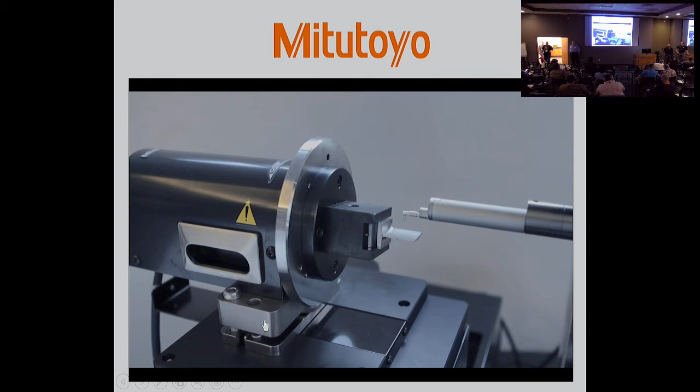Guys are going to walk through... Where'd you go? Walker.

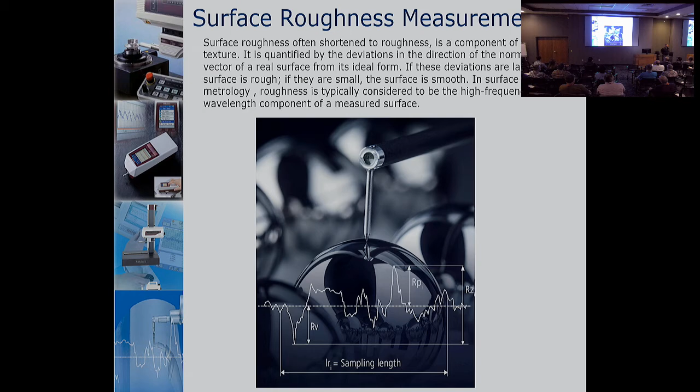Before we get into this, it's very important because most of these types of components that we're measuring for surface finish, it has a mating surface and it's critical that it functions properly. This is the very micro level of things. The very tiny peaks, valleys, and deviations of a surface can have a great impact on how something seals or mates with another part and functions for the life of the assembly.

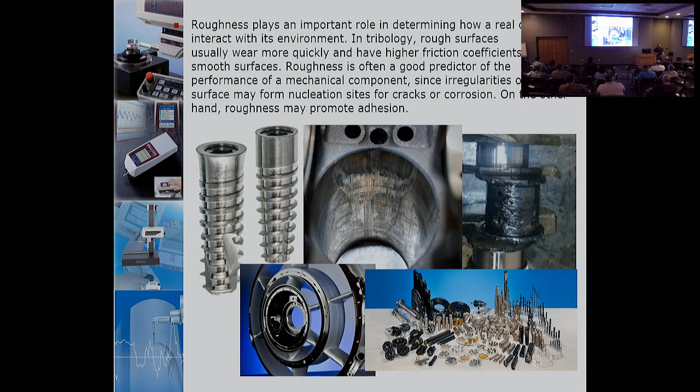So I may go through some things very quickly, but I'll very much focus on the important things here. As we look at a part from a macro level, the primary features of a surface are, on a macro level, the size, position. Then we get into this world to some degree with form.

Now we get into the actual texture of the surface. There's a lot going on there, although we primarily look at the roughness. But there are larger components like waviness. That smallest level that we're looking at, those very fine peaks and valleys of that surface that can have a high impact on its function, it's roughness, and that's what we're going to talk about here today.

Why do we measure surface roughness? Hey, I have to measure it because it's on the print. I need to make sure that it complies. Identify good and bad parts. But like most of metrology, we can use this information and control our process and adjust things before we have bad parts or defects.

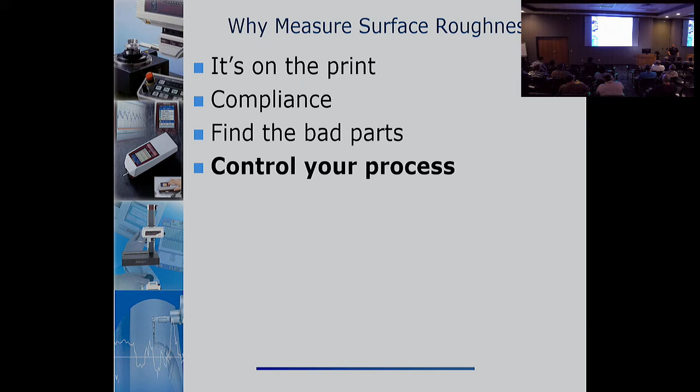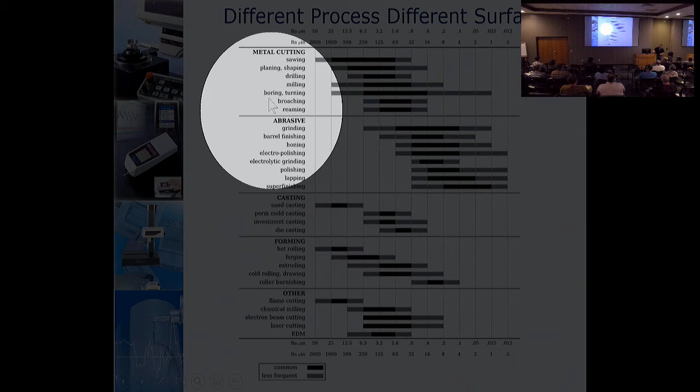This may be hard to see, but this is a nice chart. Different types of machining and ways that we make parts produce a different surface finish. You have everything from saws that will have a very coarse surface after you cut it. We're more down in the world down here where we have grinding, finishing, honing, things of that nature, where we have a smoother finish that we want to check with this type of equipment.

It's a complex science in itself, but the nice thing is there's a long history of tactile roughness testing, and there are many standards that have defined a lot of the ranges and parameters and settings and the ways you go about taking these measurements. So a lot of this presentation, I'm going to refer to some of these definitions.

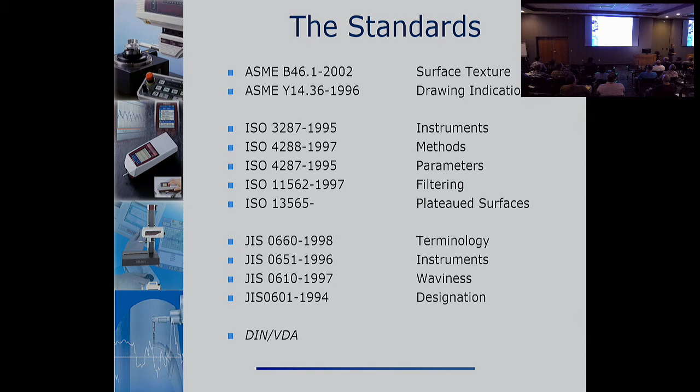At the core of tactile roughness testing is the detector, the sensor that is holding the diamond stylus and monitoring as it traverses across, measuring those peaks and valleys. Inside of all of these tactile sensors is an LVDT. It is very good, it has very fine resolution. It can see very small changes over a very narrow area.

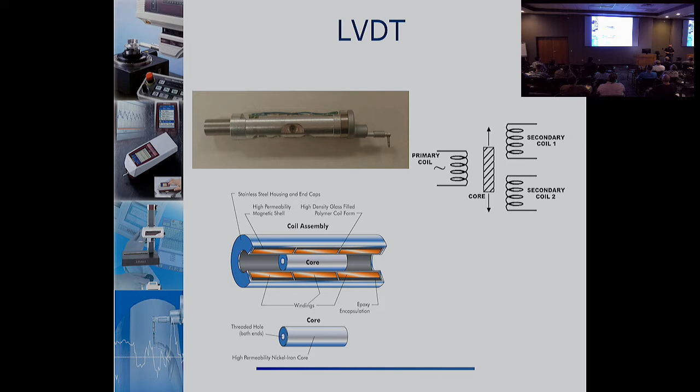Most of these sensors have a total vertical travel of 32 thousandths of an inch, or 0.8 millimeters. So we're not traveling an inch up and down, we're looking at those micro peaks and valleys, and this sensor is capable of nanometer resolution across that very small range, utilizing an LVDT.

The core system on any profilometer surface roughness analyzer needs the detector itself, which we just discussed, the LVDT, which has a diamond stylus, some type of drive unit to pull it across in the x-axis, and some type of analyzer to take that signal and create the digital data points we want, in software or firmware, and produce the results we're after.

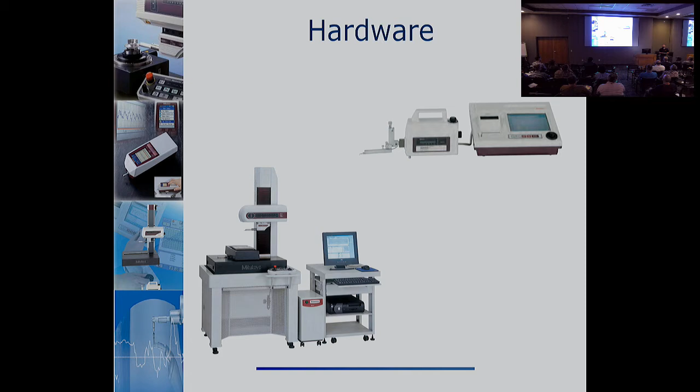There are many different types here. You've probably seen small handheld units, something you can hold in the palm of your hand, and there are systems that are fully automated with 5 or 6 different axes to maneuver parts around. But the core is always there: we need that detector that can sense those small peaks and valleys, something to pull in X, and something to analyze it.

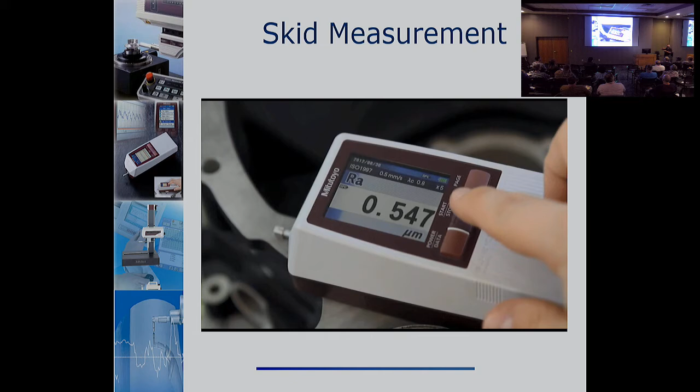It's very important in tactile roughness testing to understand the benefits and limitations of the two different types of tactile roughness testers. This is what we call a skid measuring type. The skid refers to the bottom part of that detector, which has a skid or face on the bottom with a hole in it that the diamond protrudes through. That entire skid is pressed against the surface with a significant amount of force, making this a more rigid test, something a little more conducive to an environment that's not completely free of vibration and other issues. So that entire skid is pressed against the surface, the X is pulling, and independently, that diamond stylus is monitoring those peaks and valleys as it pulls across.

As this shows, the skid type system has a skid datum, that's the face being pushed by the pivot with a large amount of force against the surface, making it more rigid. The diamond stylus itself has a very low amount of force and is monitoring the peaks and valleys as it gets pulled across. This is the most commonly used system because it's very compact. It's more protected, since that skid nose piece protects the stylus to some degree. They're the least expensive and the most commonly used.

But there are limitations to this type of system. One limitation is because of the mechanics of that skid following the larger components of the profile, and only measuring the smaller components with the diamond, you can only measure roughness with the skid type system. There are some other components to the surface that sometimes we want to monitor, such as waviness, that is mechanically filtered out if you're using a skid type system. But most of us are after roughness.

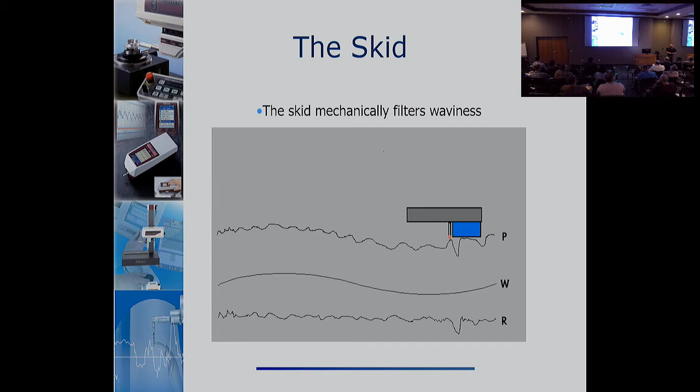A skidless system, as the name implies, gets rid of that skid. No more skid being pressed against the surface — now only the diamond tip of the stylus is in contact with the surface. So this is measuring the true profile with no mechanical filter. The benefit here is, if you could perfectly measure in the same place with the two types of systems, skid and skidless, since this is free of any type of mechanical filter, this would always be the best representation of that real surface, because only the diamond is touching and monitoring those peaks and valleys.

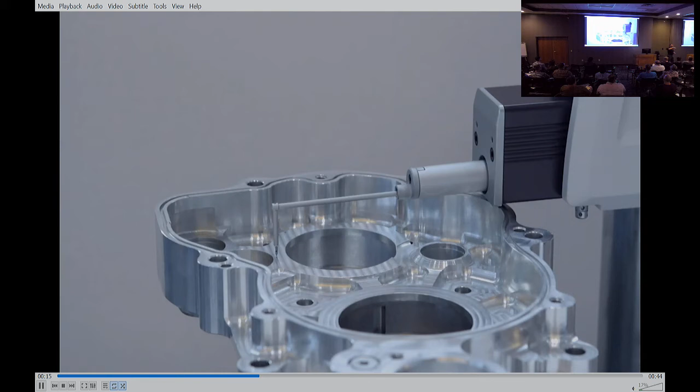There are a lot of benefits to this. As I mentioned, it's a truer representation of that surface. It can do other things besides roughness, such as waviness. The skid system can only measure on a linear, flat surface. If you had to measure on a non-linear surface, like a radius, for surface finish, that skid would prevent you from following that surface and measuring. The skidless system not only can physically follow a non-linear surface, but those systems will also have, either in the firmware or software, the ability to compensate or remove the overall geometry and give you roughness. I have an example of that here in a moment.

The only drawbacks to a skidless system.

Oh boy, you're not going out there. There we go.

The only drawback here is, since you don't have that skid and that high amount of force pressing against the surface, this is a little more susceptible to environmental issues such as vibration or even airflow. If there's a vent blowing directly on the sensor, that can impact the resolution we're measuring. This is a rigid coupling, so you have the x-axis pulling only the detector, and the only movement is in the LVDT of that diamond following the peaks and valleys. So true representation of the surface, able to do many other things besides roughness. The only drawbacks are this system is a little bit larger, the drive unit itself is a little bit larger, it's a more expensive system, and it's a little more susceptible to things like vibration and environmental noise.

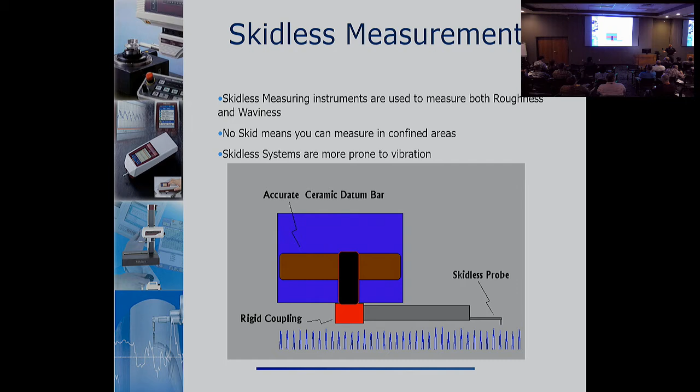So that's kind of the hardware, and that's a big thing to consider. There are definitely limitations with skidded - the styli only get so small, and some of the other things we talked about. The skidless has a much larger variety of probing or styli. They get smaller, deeper, longer with skidless. So that's a review of the hardware.

Now this gets pretty technical, but it's very important to understand what's really going on when we take a measurement and how that finally gets you a number at the end, RA of 32 microinch or whatever it may be. It's not as simple as most of you have found. You don't just tell a system, measure a half an inch and give me an RA. There's a little more thought to it. There's some things we have to consider of the surface that we expect. So we're going to get into some of those things.

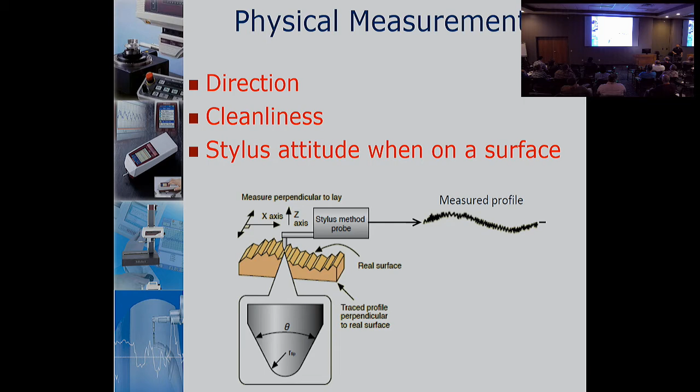Here's the fun stuff. So whenever we're looking for some type of surface texture, we're always applying two filters. We're going to eliminate things that are larger than we're looking for, and smaller, even with roughness. So a good analogy is, and we'll do this in a moment, just think of the frequencies in a surface - we have large ones, small ones. Let's talk about them like they're rocks and boulders and mountains. We need to isolate small things and get rid of big things.

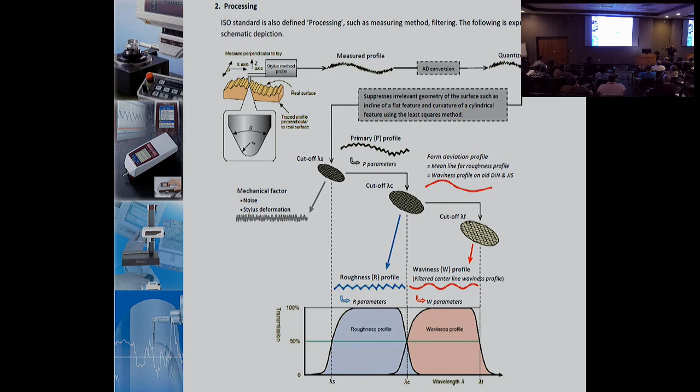That LVDT is an analog sensor. So as that core moves up in the LVDT, it's changing the analog signal that's coming out. Well, we can't do much with that signal itself, so we need to convert it to digital information. So there's always going to be a filter that gets set, and I'm going to make your life easy - we almost exclusively use the Gaussian filter. There's some other older filters for older technologies. Now the Gaussian filter is used as your signal filter if you ever see that on any of your equipment. We're going to use a Gaussian filter that converts the analog signal to digital data points. That one we won't dwell on too much.

Here's the fun stuff. How do we decide what to eliminate, large and small? Well, it's all standardized, but let's start at the macro level, and whatever surface we're measuring, let's think as if we're out in space and looking at a mountain range. We can see everything - we can see the curvature of the earth, the really large peaks and valleys, and as we zoom in, we can see some of the other things.

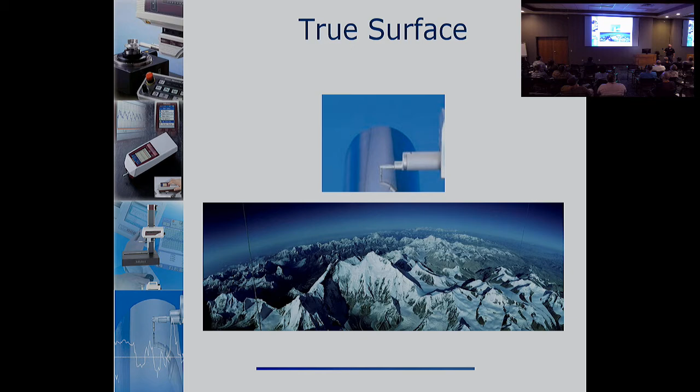So that top picture, let's think of measuring surface finish on an arc like that and see how we get to the point where we isolate the roughness profile, because once we have the proper roughness profile, we can derive the roughness parameters that we're after. The very first thing that we have to do is eliminate any overall contour. If you're on a linear surface, there is no overall contour - we're just linear. But in this example, if we're measuring on a radius, the first thing we have to do is remove the radius. There are some other types of compensation - parabolic, elliptical - but they're very rarely used.

It's usually when you're measuring on a radius, you use things like we see at the top, curve compensation. So if we turn that on a system, it will create a best fit circle and then take all those smaller components and straighten them out on a linear graph. So it's very important, if you're not measuring on a linear surface, you need to make sure you compensate for the overall profile.

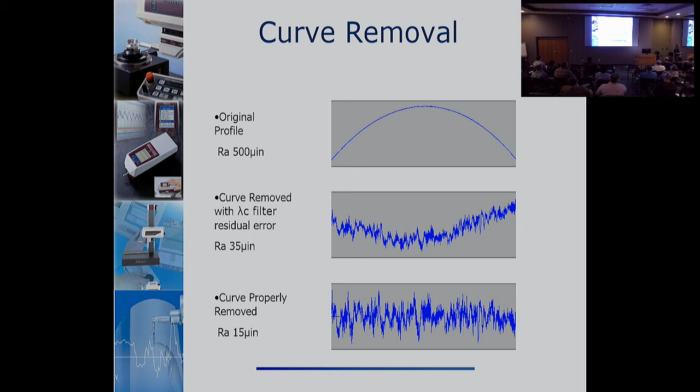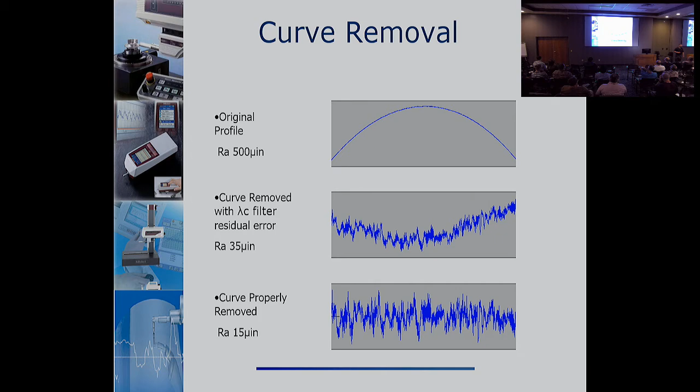There's the curve, and we take all the information along the curve and straighten it out on a linear profile. It's very important - let's look at these three pictures. If I use my roughness tester and measure it on a curve, and I did not apply a compensation filter, I might get a number like 35 microinch, and there's some residual error still in there from the curve. If we had done it appropriately, we'd get the graph on the bottom, and it's a very different number of 15. So if your call out was 16 microinch and you didn't do this properly, you start failing parts because you're getting high numbers when in reality they were passing.

There are things like tilt and inclination compensations as well. Now that we've removed any overall profile, what we have left is referred to as the P profile, or primary profile. That has all the different frequencies of surface texture.

We don't usually see these called out on a print. You don't see PA or PZ, but it's always in the software firmware, the start point. We have that surface texture information, the P profile, and typically we're going to start removing things to isolate the frequencies that we want. So you can think of that P profile as looking at that mountain range once we took the curvature of the Earth out.

This is not as common as roughness, but another profile that is sometimes considered is called the Waviness Profile. It's the larger frequency components in the primary profile. If we want waviness, on the low end we remove roughness, get rid of all the small things, and on the high end we get rid of things larger than we're after with waviness, and that depends on the part. As you can see from the previous slide, all that noise or smaller frequencies that were in the primary, we can remove those and have the larger frequencies and get waviness.

That's commonly used on large area sealing surfaces where bigger frequencies may dissuade the mating part from sealing properly. But what we're usually after, and waviness would be like the larger ridges, removing boulders and rocks and things from our mountain range.

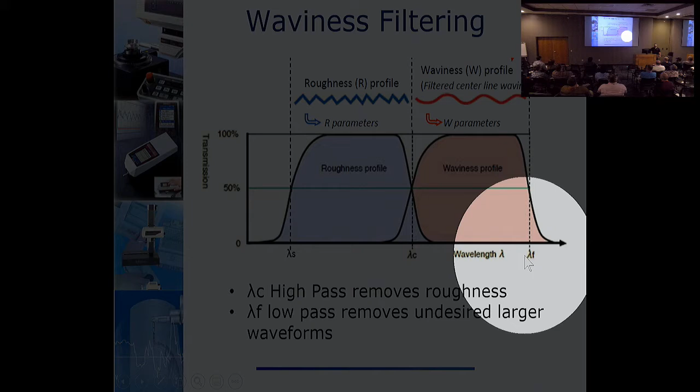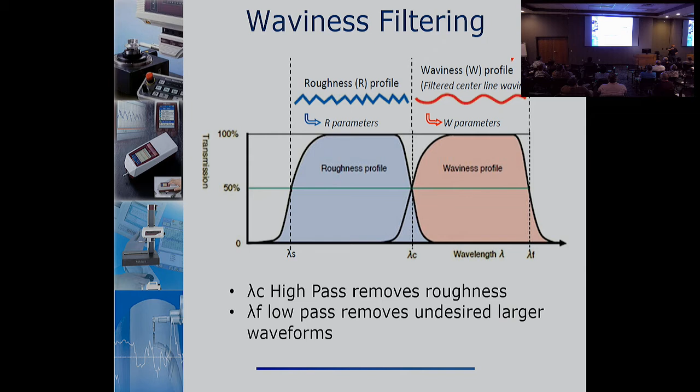This is kind of showing the types of filter we use, and we're going to start seeing these at the bottom here. I keep forgetting I have this guy here. The Greek letter lambda S, lambda C, lambda F. We refer to these as cutoffs or filters, because what those are establishing is: these frequencies that are smaller, take them out; larger, take them out; and we've isolated what we want in the middle.

This is the one that we're usually after. In roughness, that middle character at the bottom, lambda C, has many names unfortunately: sampling length, cutoff, lambda C. That is our high pass filter. So when we set a horizontal value like 30 thousandths of an inch as lambda C, what that means is any waveforms larger than 30 thousandths of an inch, remove them.

On the other end, on the left down there, we see the lambda S. That's our low pass filter. Filter out things that are smaller than this number. We'll talk about that in a moment with roughness.

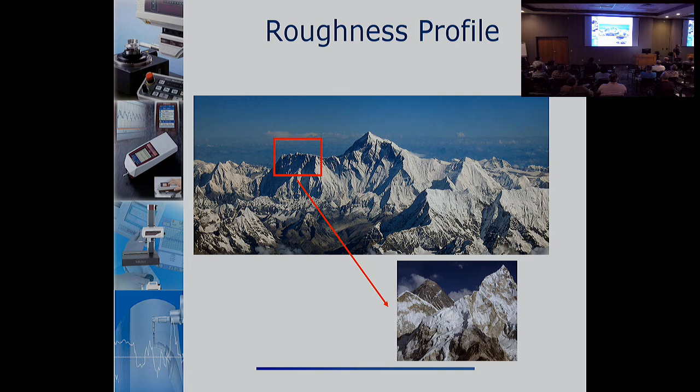Roughness, we can think about, we're trying to take out the larger components like the big ridges and isolate the smaller things. In this analogy, like boulders. Maybe we're walking across and we want to know how hard it's going to be. But there might be very small things that we also want to eliminate.

In roughness, those small things are typically noise. It's frequencies created by electrical noise in the system itself, some noise in the environment, vibration to a degree, and some other things. But there can be this really high, small amplitude, high frequency components that we want to eliminate on the small end that are noise.

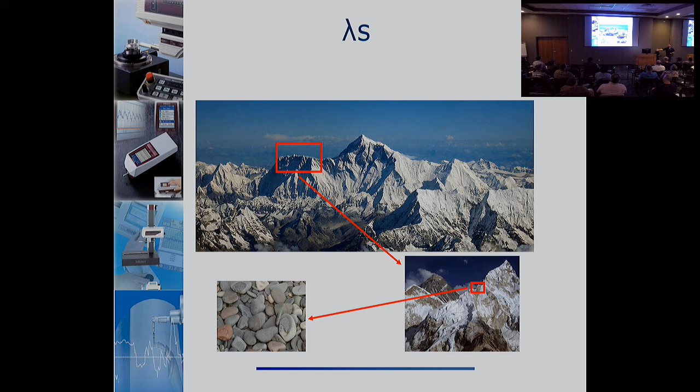We want to isolate roughness, so we take out the bigger things, waviness, and isolate roughness. So we can think of it as like mesh filters. If you're after a certain size rock, you can use one mesh to get rid of the little things, another mesh to get rid of the bigger things, and what you have left are the things in the middle that you're after.

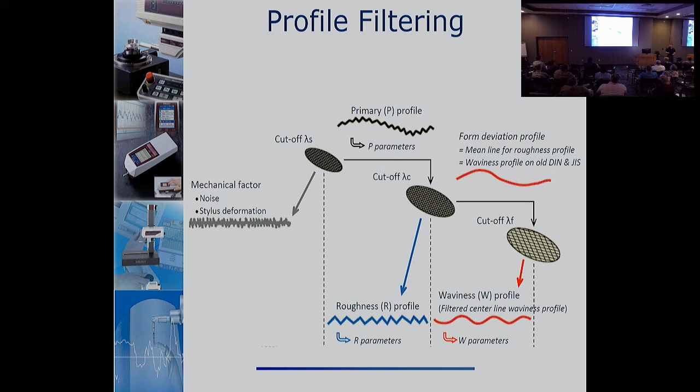Luckily, we don't just arbitrarily decide I'm going to use certain values. This is all standardized, so when you see your print and it says check 16, that's assumed roughness, roughness average, RA, 16 microinch or less on our callout. Just that value tells us everything we need to know to properly set up this test.

In microinch, that's everything from above 4 microinch up to 80. So most of you, as you're doing your testing, you see 8 microinch RA, 16, 32, 63. Those all fall in that range. The standard tells us we use a 30 thousandths of an inch cutoff, and that's what we typically use.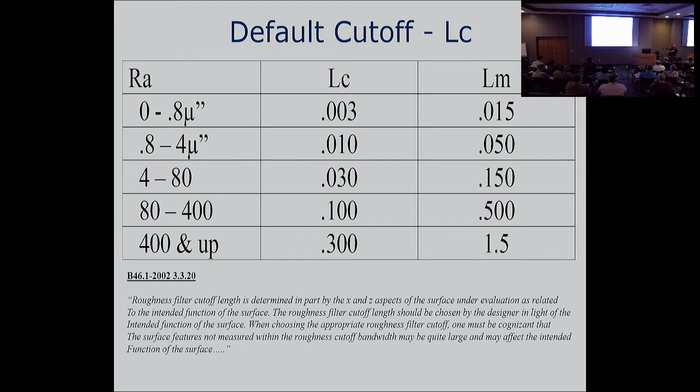That lambda C, your sampling length cutoff, is the most important thing because it acts as a filter. If you use an inappropriate one, you're filtering inappropriately and you'll get the wrong roughness profile, with incorrect results. So per the standard, you should use the appropriate one. That's one component of setting up a tactile roughness test, and it's the most important.

So what else creates the overall length that we're measuring? Well, we usually want more than one of those cutoffs, say 30 thou. The optimum number is 5. So if we set a 30 thou cutoff times 5 samples, we are evaluating 150 thousandths of an inch.

The yellow there is a feature on all of these systems called pre and post travel. It's extra distance you can add at the beginning and end that allows the motor to start pulling the system and ramp up, then in the middle take your test at a consistent speed, and at the end, the post travel, it ramps down. So your measurement evaluation length in the middle is done at a consistent speed.

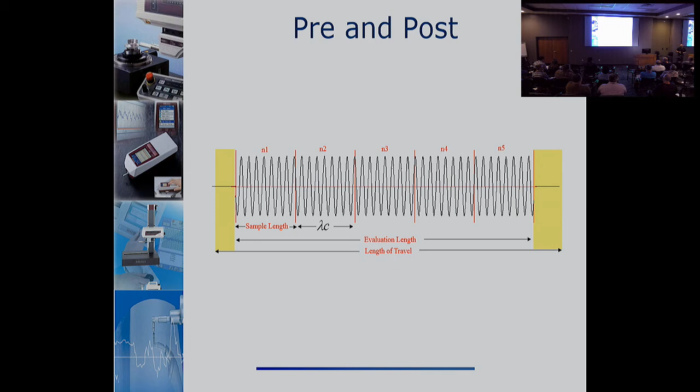As I mentioned at the beginning, we don't walk up to the system and say, measure an inch and give me RA. We look at the expected RA, define the appropriate sample length, use X number of samples, 5 if we can, and turn pre and post travel on and off. All of those things produce our traversing length, the actual physical length that it'll pull.

Someone may say, what if I have a 16 finish, but the land I'm trying to measure is only 100 thou wide? Well, all those settings, 30 thou times 5, plus pre and post, that equals 180 thou. So what should I start manipulating first to reduce this length to measure on a smaller surface?

Pre and post travel is the first thing you can eliminate. That's nice to have on, but it's the first thing we take away if we need to. Then, if you still don't have enough room, start reducing the number of samples. If it's a 100 thou length, we would set our system to a 30 thou cutoff times 3. With no pre and post travel, now it's going to physically measure 90 thou on that 100 thou surface and give us our result.

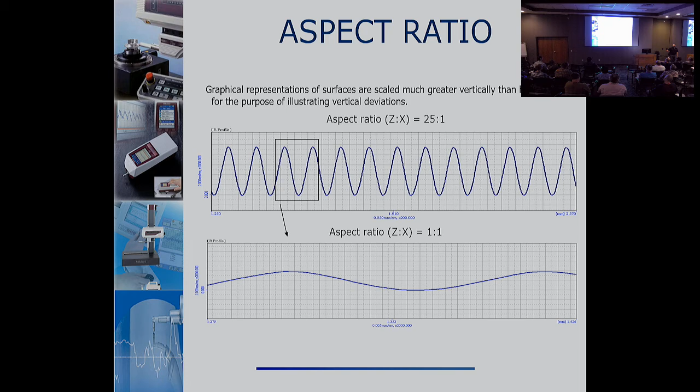Aspect ratios: when you're looking at a lot of these reports, they're greatly exaggerated in the vertical axis. If they weren't, everything would just look like a fairly flat line because the deviations up and down are so small. We greatly magnify them so you can see the peaks and valleys across there.

I keep referring to a diamond stylus. These tactile systems have a diamond on the end, and those come in a variety of sizes and angles. That's all standardized as well. Most systems and most surfaces, you should be using a 2-micron radius diamond with a 60-degree angle, or a 5-micron with a 90-degree angle if you're on a rougher surface.

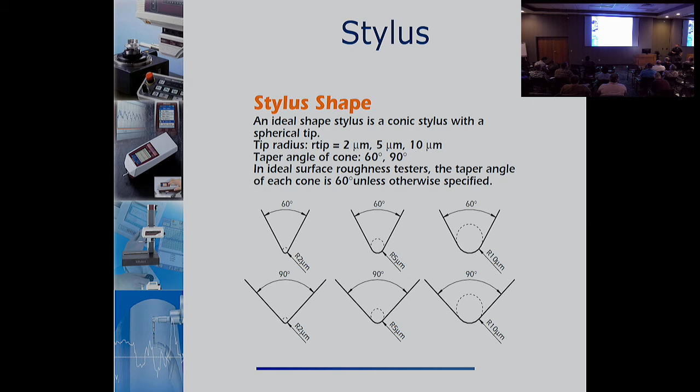We have information, charts and everything that can tell you, hey, your print calls out a 16 micro-inch finish, you should be using this diamond, this setting, this setting, this setting. So that's the beauty of it, and a lot of the systems and software will have assistance right inside to help guide you.

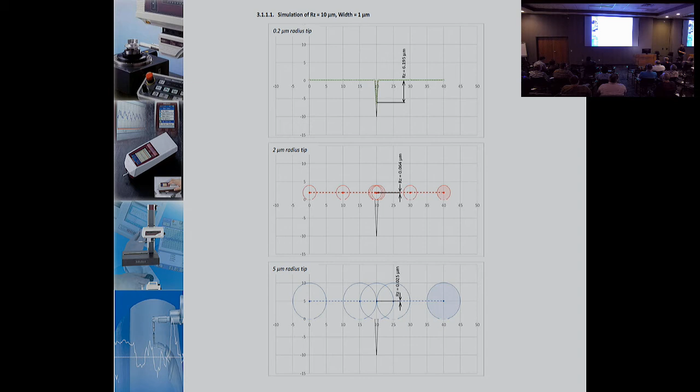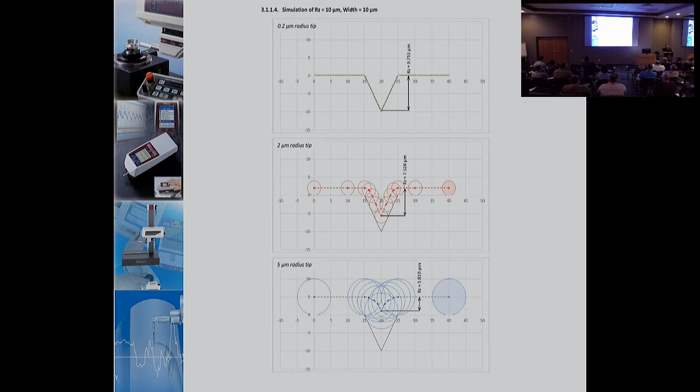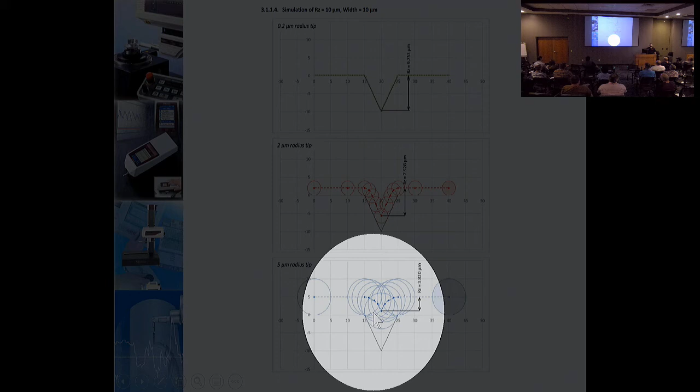This is a pretty cool theoretic test with different diamonds. If we think especially of the valleys, depending how narrow and deep they are, different sized diamonds can only get so far down. What this shows is if you took a 5-micron radius diamond tip and tried to go down in the valley, versus some theoretic perfect 0 radius diamond, it would get all the way to the bottom. With a 2-micron radius tip, it would follow the surface and bottom out around here, getting close to the bottom. But if you use too large a diamond, it's going to slightly enter the valley and then come back out, and you won't get the depth that you expect.

So that's kind of the hardware, and then the theory of all the settings and filters. Why did we set all that up? So we could physically trace across the surface, use the appropriate filters, and create the roughness profile. All the parameters we're after just use that profile and apply different calculations to report the numbers we want. As long as you have the right settings and use the hardware correctly, you'll get the correct roughness profile, and from that you can get all the answers you want for 2D roughness.

I'll mention a few other things. Calibration of these systems is a little different. They typically come with a 120 micro-inch RA reference specimen, with a very uniform sine wave surface at 120 micro-inch RA. We go through a calibration procedure: we measure it, it's supposed to be 120, we find out what it measured, then use those two values to come up with a compensation value. It's very important to calibrate these systems, but not too often, because every time you calibrate you're changing that compensation. So I suggest calibrating when necessary, like when changing styli, depending on usage frequency, but verify as often as you want.

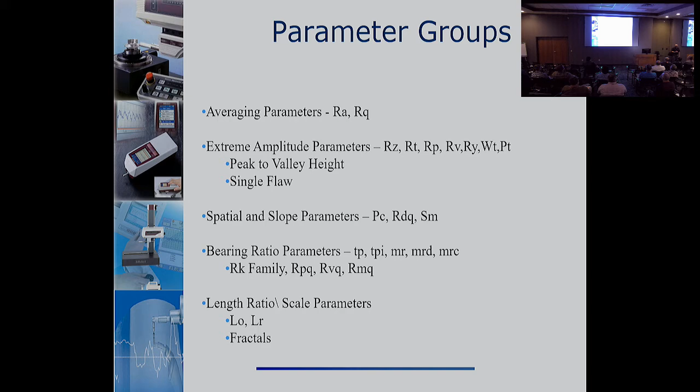All right, we use the right hardware, the right filters and settings, and now we've created that roughness profile. It's just a bunch of data points, but it's the correct filtered roughness profile. I'd say more than 90% of users are only after one thing on that profile — capital R, small a, roughness average. But there are many other useful parameters, grouped into families. I'll go through these pretty quickly and point out some important ones.

There are two averaging parameters. The one everyone's familiar with is RA. It calculates every single data point's distance to the mean line, the center, in every cutoff, and then averages them all together. This is the most stable and consistent parameter. Since it's an average, it's the one we use to correlate and calibrate, and it's the one used mostly in the industry to check parts. Because it's an average, it has a lot more consistency.

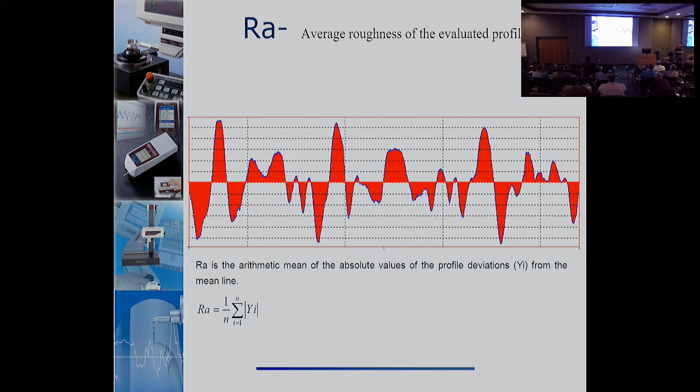Maybe 10 years ago, I would have said 99% of users only look for RA. But RZ is a very important parameter, and it's becoming more and more used. Probably eventually we'll see on most prints an RA and RZ callout, because RZ is almost the opposite of RA. We're looking for the extremes in each cutoff.

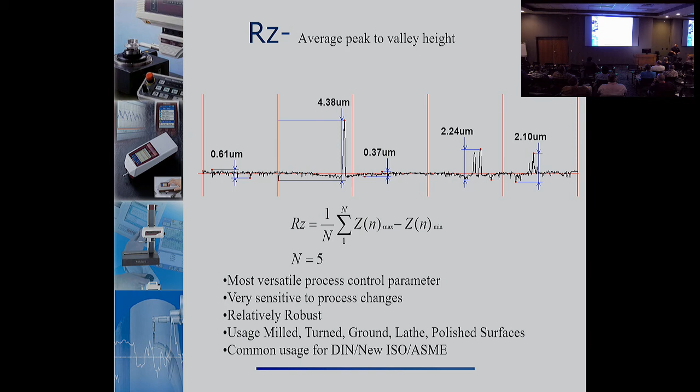So if we set this to 30 thou times 5 for our setting, it creates this roughness profile. If this were our first cutoff, this first 30 thou, what RZ does is it finds the very highest point and very lowest and gives you that vertical distance. It repeats that in each cutoff, and then it takes those values and averages them together. So it's the extreme peak to valley in each cutoff, averaged together, so you're getting an average of the extremes across the surface.

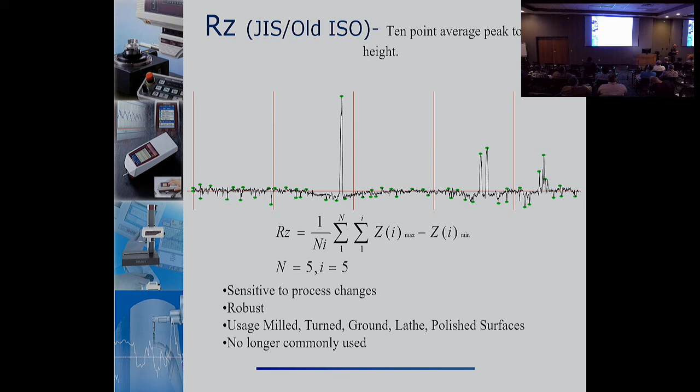So that gives a lot more definition. If we measured those 3 different surfaces that looked different from each other, they would have radically different RZs where they had the same RA.

RP - sometimes in this type of test, we're more interested in the peaks. Maybe this is a sealing surface, and if a peak is too high, it won't seal properly, and we'll have an avenue for gas or liquid or whatever it is to escape. So there are parameters like RP, which look at the highest peaks in each cutoff or across the whole thing.

Conversely, RV, roughness valley depth. If we're really interested in the valleys, RV can tell you a lot about how deep those valleys are across those surfaces.

And then we get into some really specialty ones. RZ1max will look in each cutoff and see what the peak to valley height is, and then report to you the one that had the biggest value. So it's like the extreme of the test that you took, at least in one cutoff.

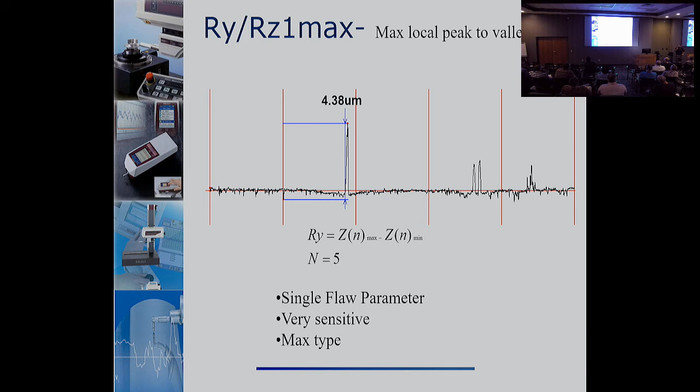And here's the most sensitive parameter. RT is called roughness total height. Anywhere across my test, find the very highest, the very lowest, and tell me the total height of this roughness profile. So that's going to be the most sensitive. If I measure here and there's really no peaks, I'll get a low number. If I measure over here and there happens to be one really big peak, it's going to report that. So it's the most sensitive.

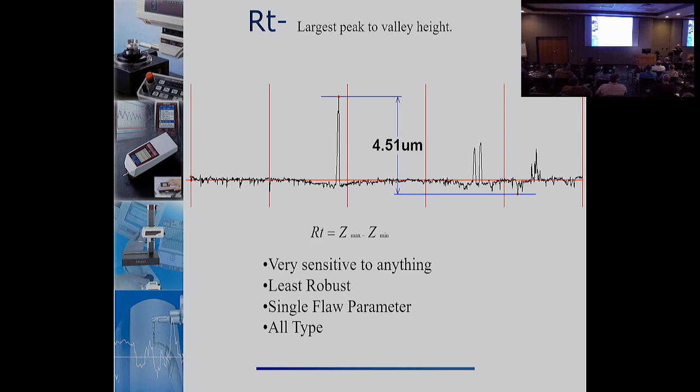And then there's a bunch of specialty parameters that have a lot of definition and can do some predicting. I think there are about 80 roughness parameters throughout the different standards that you can use for different situations. Most of the time we're looking at the peaks and valleys because something is mating to the surface. Sometimes we want valleys to be deep enough to retain lubricant, like a piston in an engine, in a cylinder liner. If it's too smooth and doesn't have valleys, it can't retain lubrication and it's going to get hot and seize up. If it's too rough, those two surfaces are going to degrade each other and cause damage.

So we need something in the middle, a sweet spot. There's a whole world of parameters that can look at those profiles and do some predicting and estimation of lubricant retention, things of that nature. If it's a metal seal, we're probably looking at the peaks a lot, right? Because any protruding peak is not going to let it seal.

But you'd be surprised some of the things that these parameters can help you identify. Some of them are useful for adhesion. The X distance spacing horizontally of peaks can impact how something will adhere to that surface. If you don't have enough peaks, maybe the paint won't stick to it. So there's a whole world of them on all these systems.

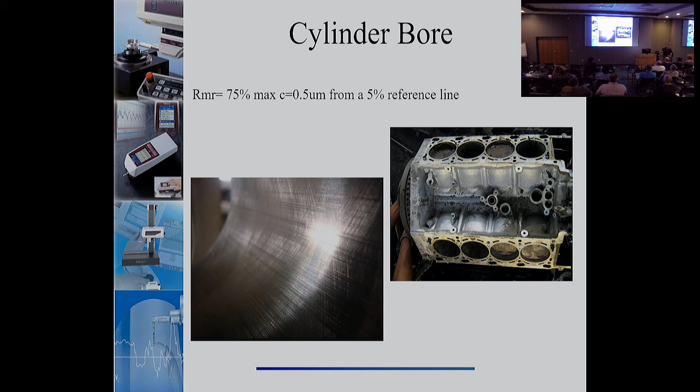It's surprising. If you look at a vehicle, there are hundreds of different components that require some type of surface texture test, waviness, roughness, the different parameters to identify bearings that are carrying a load or how something is going to seal. There's so many uses for roughness or other surface testing, and it's not just vehicles.

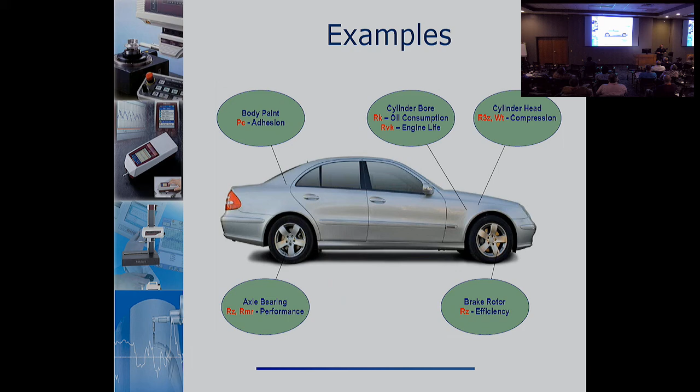It's any critical component that especially is going to have a mating part and have some type of friction or anything like that. And then I like to show this because there's a whole standard about how to properly call out surface roughness on a print, and almost no one utilizes the right way. We just see a check mark with a number.

There's a lot of assumptions there, and it's very common. So if we see a check mark with 16, we start assuming, well, we're after RA because you didn't specify any other parameter. 16 microinch RA upper limit.

But there is a way to control many other things when doing a roughness test. And some of those advanced tests where you want to set a lower limit, an upper limit, maybe more than one parameter. You can identify if this test should be taken before or after a certain process. There's a whole science to properly calling out roughness that almost no one uses.

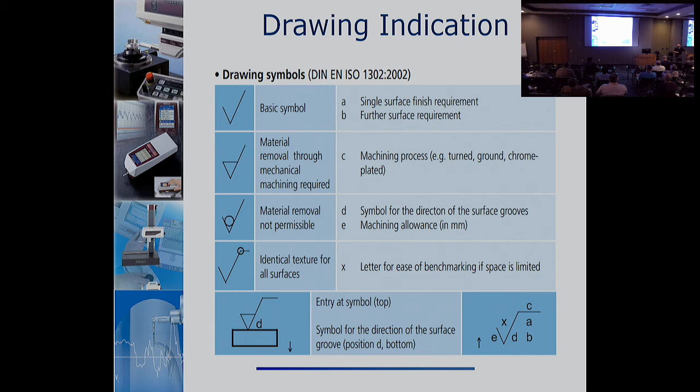The Germans like to, though. So yeah, if you see anything like this on a print, that's probably a more advanced test, and there's different areas in those boxes that they're placing different identifiers that will tell you how to set up your test.

Luckily for everyone in this room, Productivity Quality has a lot of very knowledgeable staff that use these systems and can guide you through taking the correct tests. And then also, Mitutoyo has a lot of resources that we can provide as well. So that's 2D tactile roughness testing.

If you get anything out of that, it's that cutoff. Look for that chart. Look at the number you're after. If you're making a really smooth part and it says the RA is 2 microinch, that means a lot. That tells you what sampling length to use, the number of samples.

It's the most critical component because if you use the incorrect cutoff, you will get the incorrect roughness profile, therefore you will get incorrect results. So it's very, very important.

Any questions? I'll hang out afterwards too if you have any questions for me, but I appreciate your time. And I'll hand it over to Adam to discuss non-contact surface testing. You want this thing?

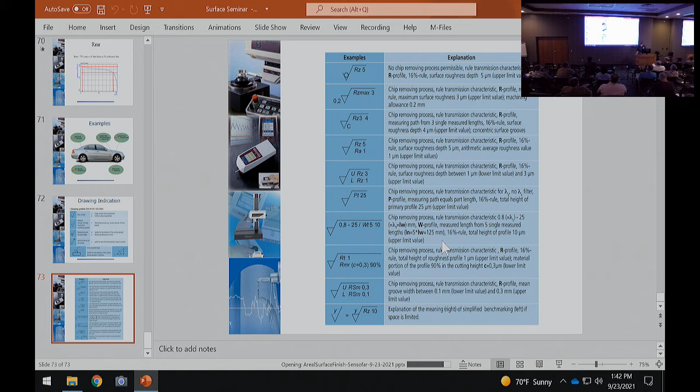All right, hi everybody, I'm Adam. I'll tab through this pretty quick, but I'll be around here after the presentation for questions, and we also have our Sensofar SNEOX out on display, so I can talk about it more later in detail with anybody who's interested.

So our Sensofar SNEOX is our 3D optical profiler, so we're going to be looking at surface finish, form, and small geometric features, obviously without touching it optically.

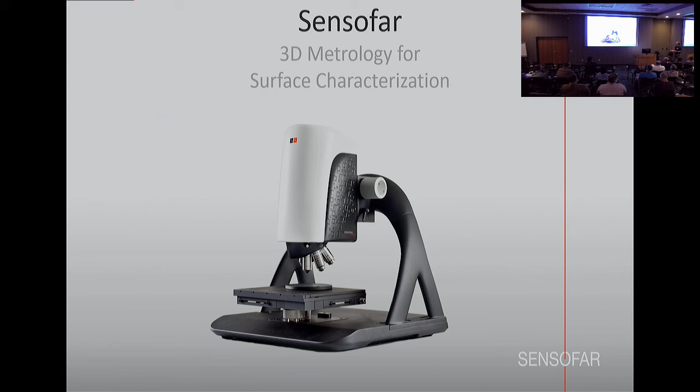So what are we doing with this? We're going to be gathering a 3D point cloud. So we will be looking down on our object and we'll be able to measure X, Y, and Z space.

We have a couple technologies to do this. These are technologies common across the industry. Sensofar is unique where we have all three of these technologies in a single sensor head. First we have a confocal technique. We have an interferometry technique, and we have a focus variation technique. Confocal and interferometry are going to be our surface finish techniques, and then focus variation is typically used for our form or geometric measurements.

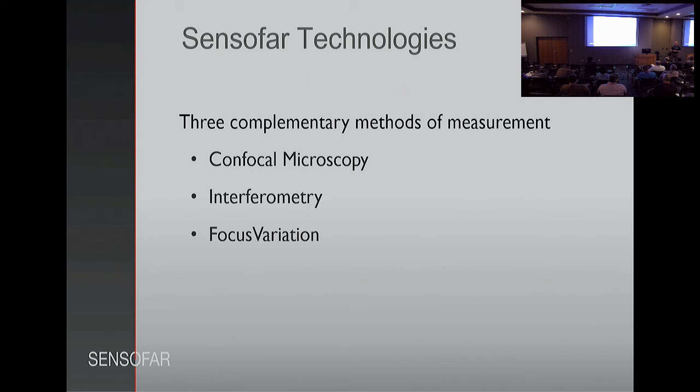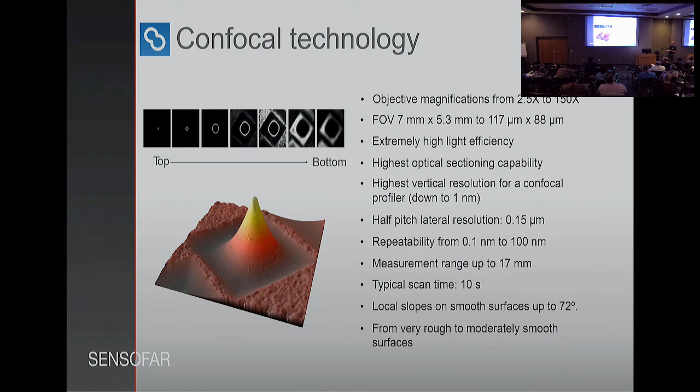Confocal, we have the best lateral accuracy with that. So in X and Y space, we can define features down to 150 nanometers. With that, we still have fairly good resolution. So our vertical resolution there to define peaks and stuff can be down to single nanometer levels.

Next, we have interferometry. This is our most accurate for vertical resolution. So we're going to be measuring glass, mirrors, very, very fine features with this because we can get sub-nanometer vertical resolution.

Focus variation, like I said, we typically measure form with this. It's going to be less accurate in X and Y, just because we're kind of averaging and using the pixels around a single pixel to define what's in or out of focus, but it's very, very fast. So we're going to use this to cover large areas on a part. When I say large areas on the part, when we're using our microscope here, that's going to be a couple millimeters. It's not going to be inches long.

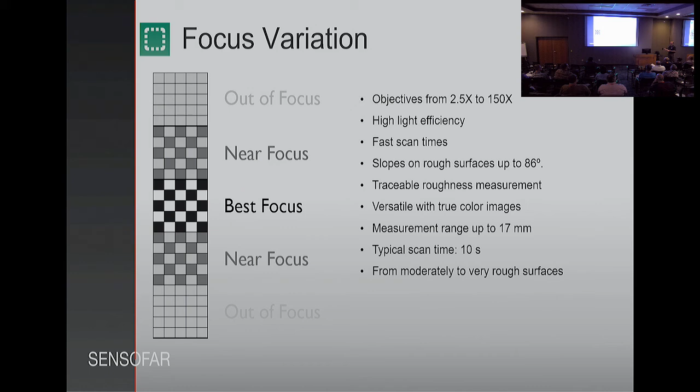We'll jump on to the next one here.

So we have standards that define our parameters just like we do in tactile measurements. We have an ISO standard that defines our areal parameters, and you'll find they are very common to our tactile ones, where we're looking for RA, RP, R parameters, or our roughness parameters. For areal parameters, they're going to be S parameters, over the surface area. So we're going to have SA, SP parameters in that liking, where we're defining equivalent math just in 3D space.

So we'll step through all these, what the standard says, what surfaces we want to look at. Again, filtering is very important. We can look at very different surfaces and get very different numbers if we're not filtering properly. We'll jump in and brief through what each of those parameters mean and how we can use those in 3D space. So we have a lot more information when we're looking at something in 3D space. We can characterize parameters and kind of shapes and objects within our surface finish a little bit differently than a tactile measurement.

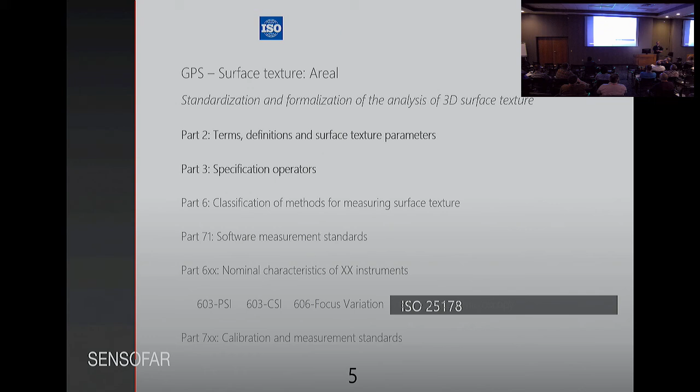So the parts we cover here, we have our terms and definitions and what those particular parameters are. Part 6 of this standard defines the technologies that this standard is applicable for. We'll see we have interferometry there and confocal there. Those are the primary technologies for areal surface finish.

When we're measuring surface finish, we need to break down the proper surface. We saw this with Tony in filtering. So in the middle here, we have what could be our pin, right? We have what we would assume to be a perfect circle, but if we look at it closer and closer, we know that there's more texture on this surface. So we might remove our perfect circular form and result in, let's see if this works, a profile here, where we have still multiple parameters within a single profile that we need to isolate down to our surface roughness or our waviness.

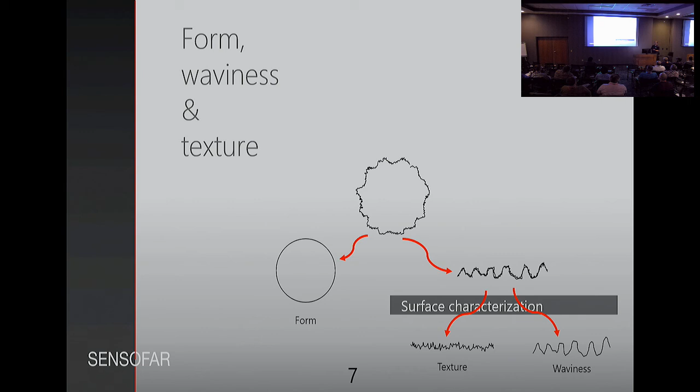Here we have a scan in 3D space. We typically view these scans on a color map like we see here. Our blues are our low points and our reds are our high points. So as we can see here, it's kind of a sphere shape where the blue in the middle is low and all of our extreme positions in the corners are red. From there, we want to remove our form, so we see our surface is getting flatter. We've removed a perfect sphere and kind of leveled everything out. But we can still see we have some blue low areas and some red high areas, so this still has our waviness in it in addition to our roughness.

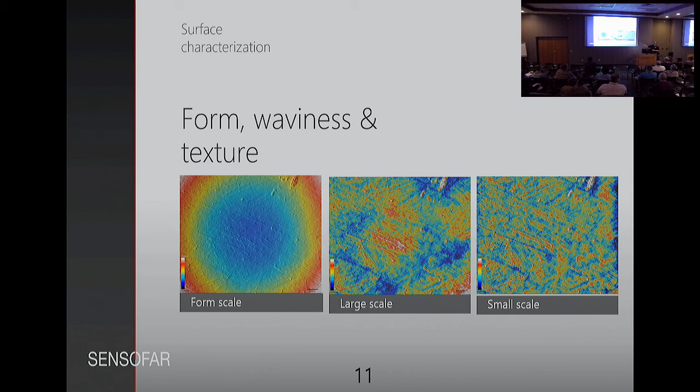We can remove that waviness, and this is what we see here, where we see just the fine features that were visible on our spherical sample. We can see them all here in space. In the image on the far left, we can kind of visually see that texture, right? We can see there's visible scratches on it, but they're all the same color, so it's harder to isolate them in vertical space to characterize them as compared to the image on the right.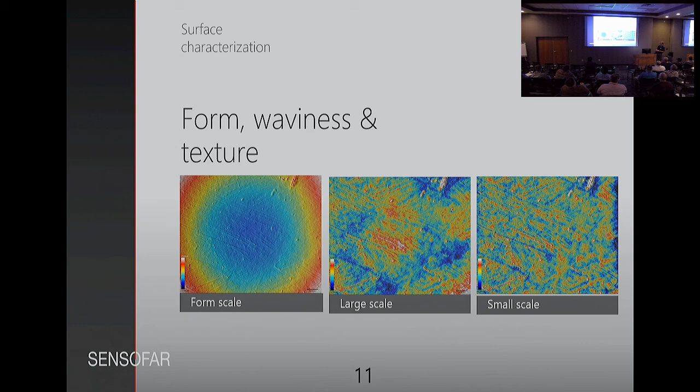Operators and filters - this one will be quick. Tony covered this. So we have different filter levels in our areal parameters. These are S, L, F. But it's the same as the cutoff logic, where we need to apply a cutoff that isolates the surface we're interested in.

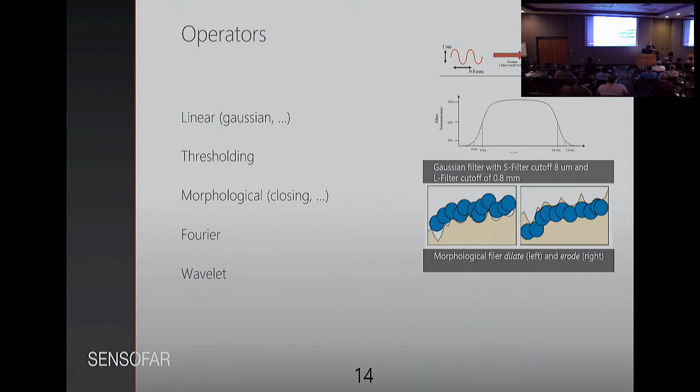When we're taking our scans in 3D, another important thing we do often is a thresholding filter. So just like we were filtering noise with a low or high pass filter with our tactile system, our areal scanner is susceptible to noise, and that's typically seen as very high peaks in our scan. So we're typically applying a threshold so we don't skew our peak parameters.

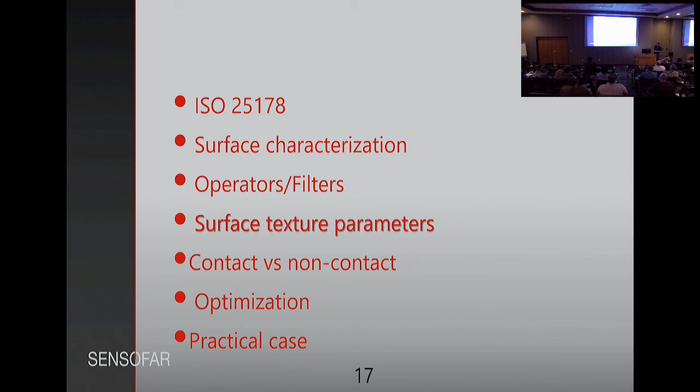We'll jump through a handful of the surface finish parameters. So we have what we see as typical R parameters, but again, they're just going to be S values here. Most common is going to be our SA and our SQ. These are our average values - this is what people see and use the most. We have our peak parameters as well, where we're looking at values, we're looking at peaks. We could be looking at the total height in this area we're interested in.

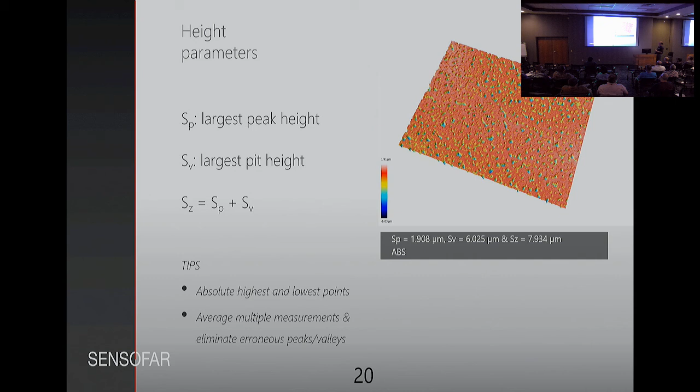The advantage here we see in 3D space is we're not doing a single profile line that's 100 thou long, but only 2 micrometers wide, right? That's the size of our diamond stylus. Now we have much more data to characterize what are the actual peaks on our sample in a much larger space. We have our averaging parameters, so SA and SQ.

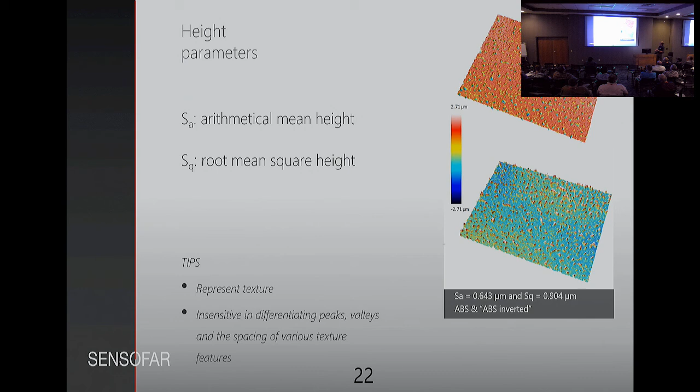The most common parameter we see, but like Tony said, these are very susceptible to not necessarily telling us a lot about our surfaces. So again, we have two images where our blues represent our lows, our reds represent our highs. It's the same image, but simply inverted. They result in the same SA value, but obviously these two surfaces will perform very differently in whatever their mating application is.

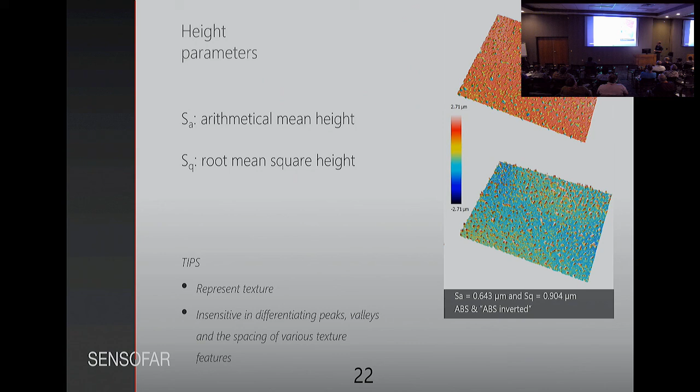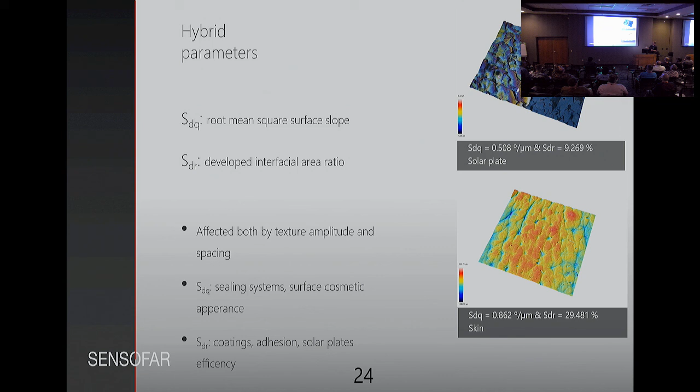These hybrid parameters are very particular to the surfaces, but they look at how much area we added compared to what would be a perfectly flat surface. As we bring this texture into our part, we're increasing the surface area of that part, so we can quantify how much surface area we're adding and how steep, or what the slope is, of this included texture.

We have our functional parameters. These are used in fluid retention and sealing surfaces. We want to hold some fluid within our surface, and we have to be able to quantify that somehow.

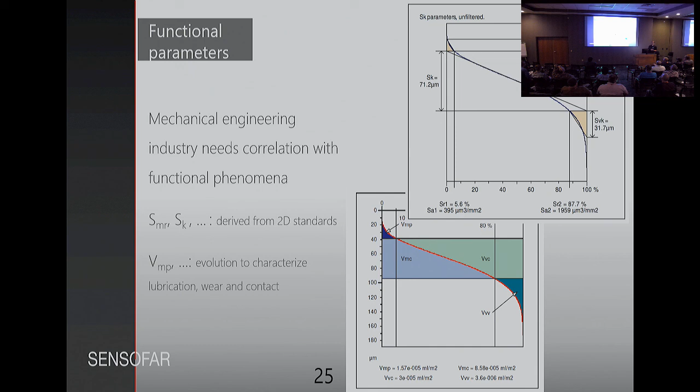A couple of other parameters are kind of feature characteristics of the part. We might not even measure the height of these characteristics, but there is a visible pattern to them, so we can quantify that visible pattern that might not have an associated height difference with it.

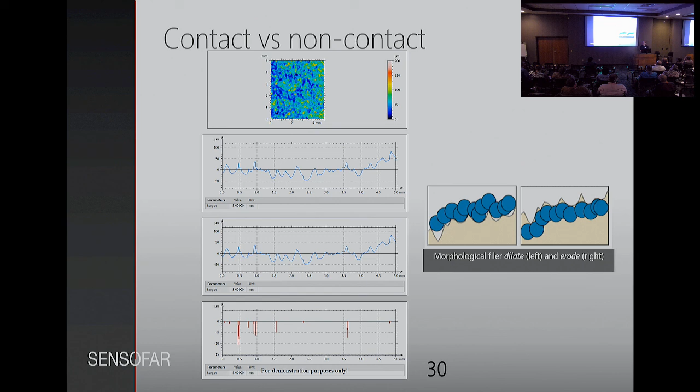Contact versus non-contact - Tony got into this a little bit with the diamond stylus size. With non-contact, it's not perfect, but our diamond size is theoretically zero. We can see further into the pits, and we're also less concerned with texture direction. When we measure with a contact stylus, we want to go perpendicular to our texture direction, but as we see something in 3D space, we're independent of that texture direction. Here we can see our morphological filter, where we could simulate putting a diamond stylus across our profile and see the areas that we would not be able to measure with a contact system.

How can we optimize these? What can they tell us? There are tons and tons of parameters. As Tony said, with contact systems there are 60 parameters across all of the standards. The most common we're seeing is RA. What does that really tell us about a surface? Not a lot, other than people know RA means surface finish. So we need to iterate through the different parameters to help us isolate what two different functional surfaces do. We have a group of good parts, we have a group of bad parts - they're measuring the same RA. How can we quantify the differences in those?

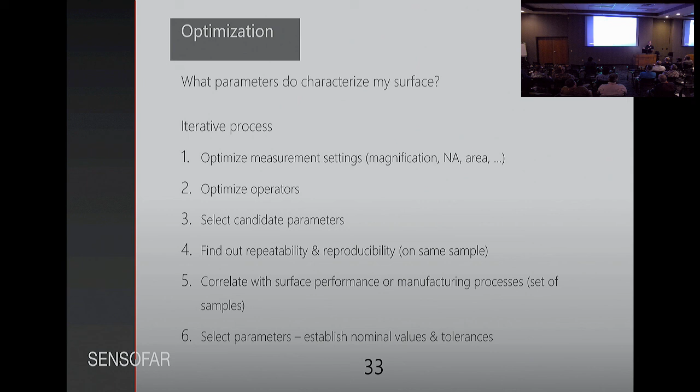On the Sensofar system, we have a module for that. We can scan good parts, we can scan bad parts, bring those into our analysis software, and it checks all of the parameters on all of the surfaces we bring in. It helps us isolate parameters that are different between our two surfaces, so it stops our guessing game - it just does the math for all of the available parameters and says these two surfaces vary on, in this case, an Sdr parameter, which looks at how much added surface there is because of the texture. It eliminates the guessing game of figuring out what the differences are between surfaces.

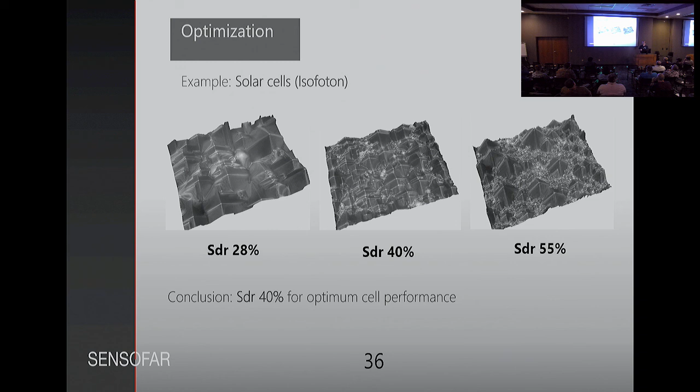A practical case, the same thing here with the included area - this is for a solar cell. They had three different processes, and this SDR parameter was the biggest differentiator between the surfaces. They found they needed some additional included area, but at a certain point, when the SDR got too high and there was too much included area, they were actually losing performance in the ability to capture photons. So there was an optimal setting of included area somewhere in the middle between the multiple surfaces that resulted in the highest performance. Areal parameters can help us see much more surface finish on a single acquisition, and allow us to better isolate parameters rather than just an average value that we typically see.